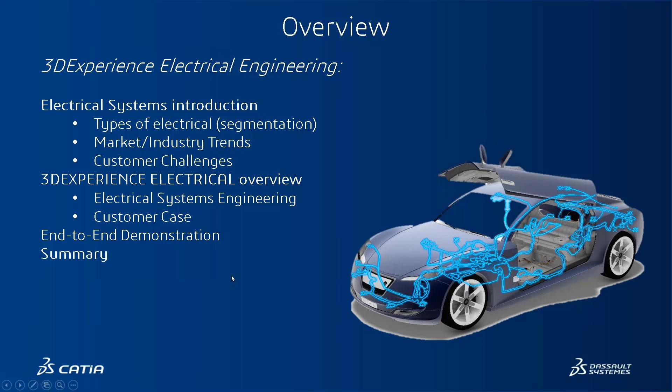Within Dassault Systemes and the industry, we see mainly three types of electrical systems: first, wire harness; second, cabling; and then electrotechnical. The wire harness is an assembly of connectors, wires, and cables, as well as additional components that bundle them together, such as coverings, fixtures, etc.

And the last segment is the electrotechnical. It deals with machines, cabinets, panels, and things like that, and this can be found in almost any industry where cabinets and panels are used. This is typically a use case of combination of wire harness and cabling within a very structured space.

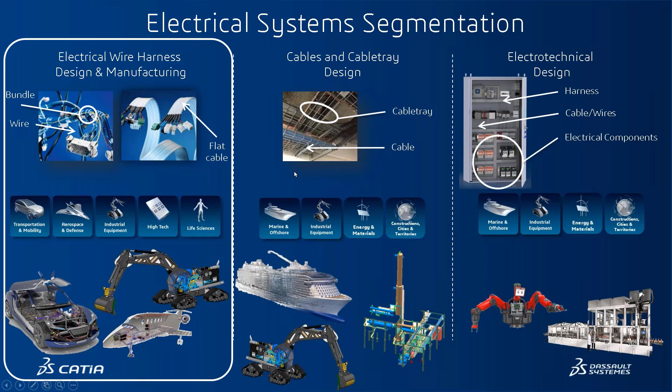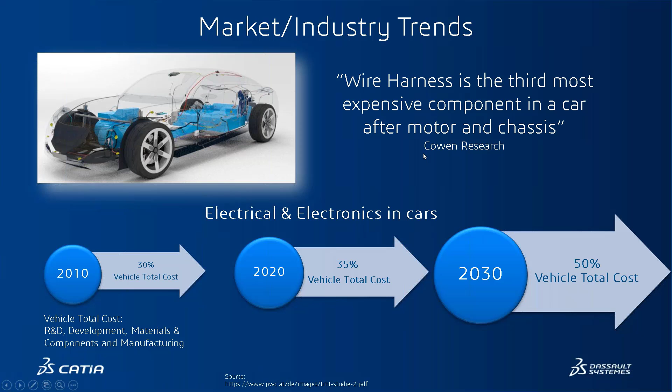If we look more specifically at the challenges this brings to our customers, we can see the challenges from the market, like cost, quality, and shortened time to market in a very competitive world. We see product challenges to have an accurate description and up-to-date information along with the process, and to avoid expensive physical mockups. Process challenges to reduce the number of applications and platforms, and avoid changes late in the process that would be very expensive.

Traceability or digital continuity is becoming a more and more critical subject with the complexity of the system. There are always simulation challenges in wire harness, both on the mechanical side and the electromagnetic side. And finally, there are manufacturing challenges such as supplier collaboration, digital continuity from engineering to shop floor operation, process planning, and work instructions.

If we look at a currently very simplified implementation that we see at many of our customers today, the harness process is covered by many applications, each with their own database or simply file-based. The communication and collaboration between the applications are very poorly defined and, in most cases, manual. This means there will never be up-to-date information available, as indicated by one of our customers, who said that as soon as we are working on a manufacturing drawing, the design is already six months old. These kinds of implementations can never address the challenges that our customers are having, as explained here.

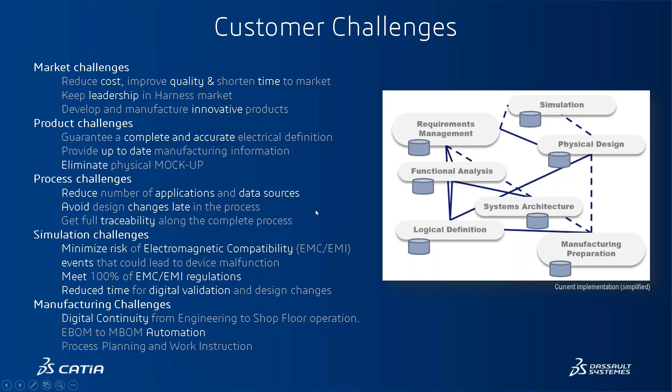So our vision is to provide an end-to-end integrated electrical system engineering collaborative development platform, to make sure that our customers can develop the most complex wire harness with the right quality, within the shortest time and at the lowest cost. The process has to be end-to-end because it is essential to cover the full process, from requirements up to the wire harness in the vehicle as installed.

The process has to be fully integrated because any data migration or duplication will prevent us from achieving full traceability and will cause additional data loss. The process has to support systems engineering because this is core for many customers, to have this very well-defined approach to solve the complex system problems that we have today.

The system must be collaborative because an electrical system like wire harness touches almost every part of the design, and it has to be worked on throughout the development process with collaboration between the different disciplines. We also need to collaborate with requirements, manufacturers, and other stakeholders to ensure the success of the harness assembly. And last but not least, it has to be a single platform, because only a platform can help integrate all the processes with consistent data and full traceability.

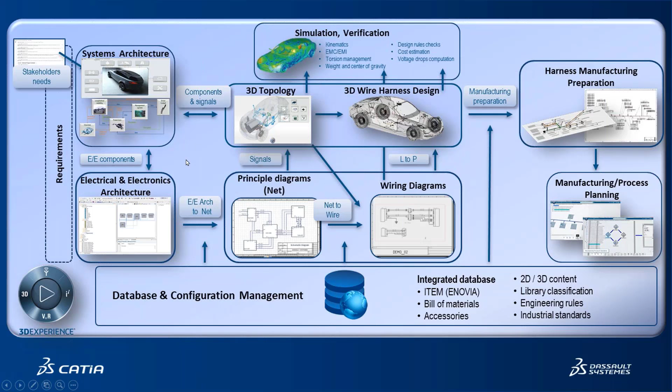This is where the system architects, for example, define the LRUs for each system and subsystem, and where they are located in the aircraft are also defined. In NoMagic, the net level information is also provided for analysis.

In the 3D, we collaborate with the system architects through aircraft zoning and equipment space allocation, which allows the system 3D architect to place the preliminary equipment inside the 3D space and perform space analysis.

With the space allocation applications, you can perform things like zone study, not just the geometrical but also functional zones.

The pathway is defined in the 3D space to estimate the volume required for each system. In this case, we are only looking at the electrical system, but it's also possible to perform the same for the fluid system as well.

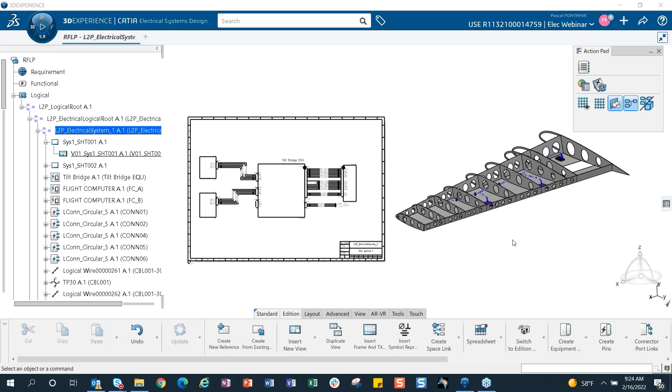I will do a live demonstration of the end-to-end electrical process with core CATIA capabilities, from the schematic to the 3D model, and then I will finish with a flattening process, mostly the documentation one. I'm not starting from scratch due to time limitation, but I will enrich this diagram, and then use the logical to physical assistant to position parts directly from the diagram to the 3D model.

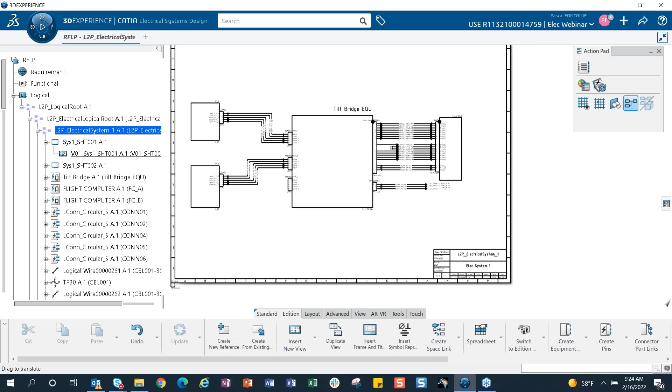Now I'm going to switch. I'm going to hide the 3D geometry, and add the grid and the snapping grid that will help me position equipment, connectors, and cables in the diagram.

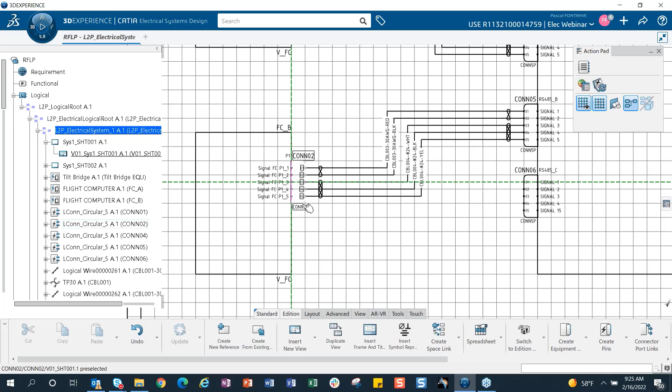As you can see, I already have some equipment positioned, what we call the LRU, defined as equipment. We have some connectors, and on the harness side, we have cables, twisted pairs, things like that.

In this process, I will use two different techniques to place parts in a diagram: the catalog function, and then placement of existing parts already placed in a schematic, using the creating from existing function.

Now in the first step, I'm going to place another equipment using a catalog browser. You could access the catalog browser from all these apps or functions at the bottom of the screen, but there's something called action pad where you can add all the functions you use very often.

Like that, you don't have to switch between different tabs. So I'm going to place an equipment from my catalog.

Usually this catalog is managed by a standard parts organization in the companies. So I'm going to place it. You double click or you can do right click, insert.

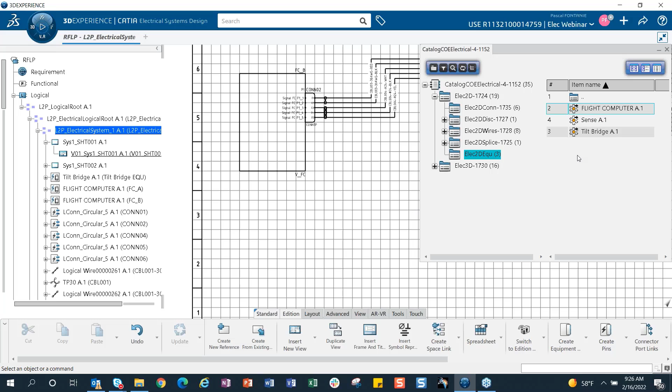The first time you instantiate one, it takes a few seconds, because the first time you are accessing the database.

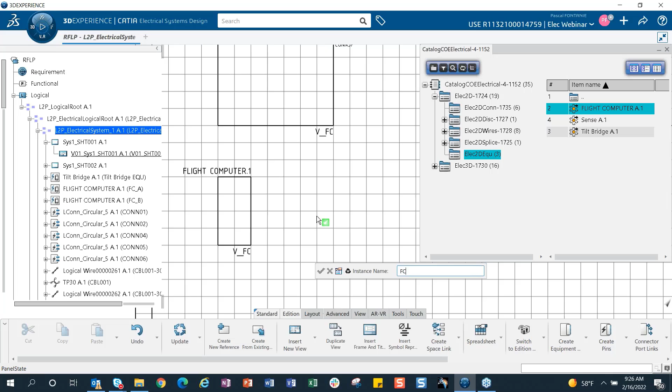Here we go. So you can zoom in, place it in space, and at the same time type the instance name, also known as instance title. You validate, and then you will see that name.

If you scroll down in the tree, you will see that your equipment is already placed here. You can resize your equipment. This equipment is coming from this catalog.

It's the out of the box representation of the equipment, but if you want your own representation, that's something you can do. We have a 2D representation for each part, but I'm using the out of the box function here.

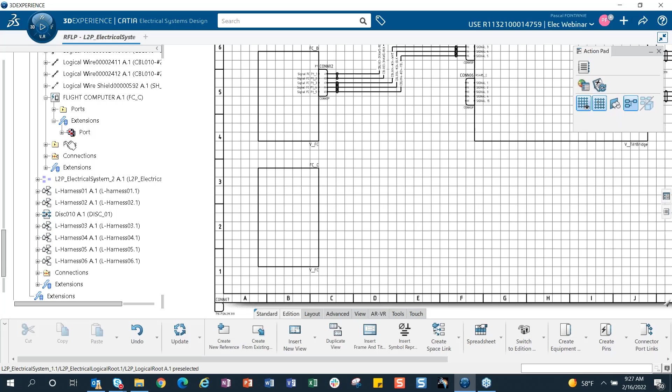So I'm going to minimize the catalog. And now, on the extension node, you will see this port that represents the connectors on the equipment side.

For this demo, I'm going to place one. I'm selecting P1 in this case. I do place in view, selecting the location on the equipment.

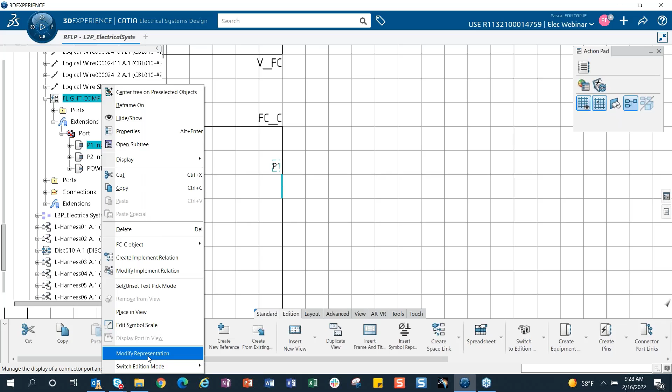And then I can modify representation, and say I want to display the pin. You can select all the pins or just a few of them. I click OK.

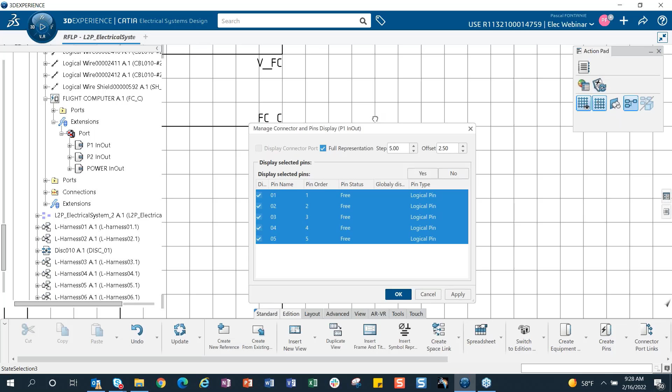And now you will see all the pins. I decided to show all the pins for this connector on the equipment side.

Now for the second step, I'm going to place the connector from the harness side. Same thing, I go back to the catalog.

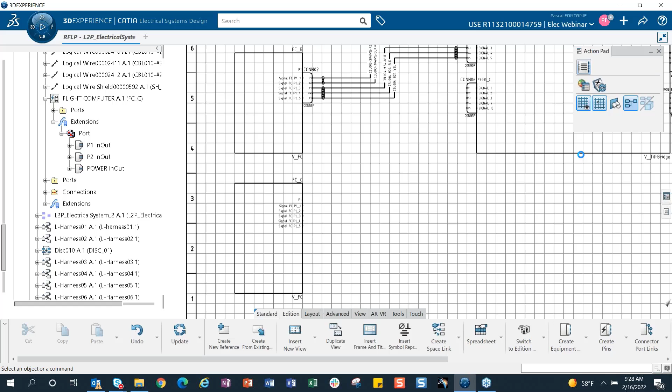I'm going to use a different chapter because to be well organized, it's recommended to use different chapters. I have one for equipment, one for wires and splices, and one for 2D representation for connectors. So I'm going to use this connector here.

So you just place it in space anywhere on your diagram. And then you have different options if you need to rotate the symbol. Now this time I want to display the pin.

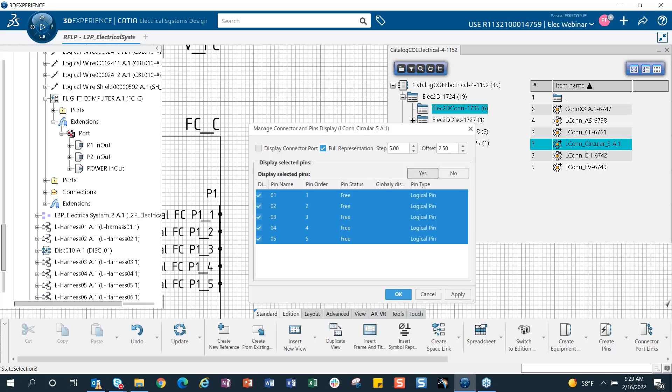So I want to display all of them. You select the first one, Shift key. Yes, you click OK. And then you want to link it to the connector on the equipment side.

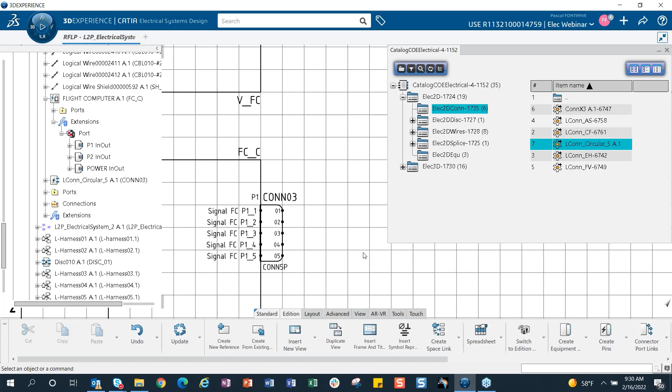So you click on it. And then you can enter the instance title or instance name of the connector. You validate, and then you will see the connector.

And now this connector is linked. The connector from the harness side is linked to the connector on the equipment side. And so all the text you can see here, they could be managed. So in this demonstration, what we are showing is the instance name of the connector.

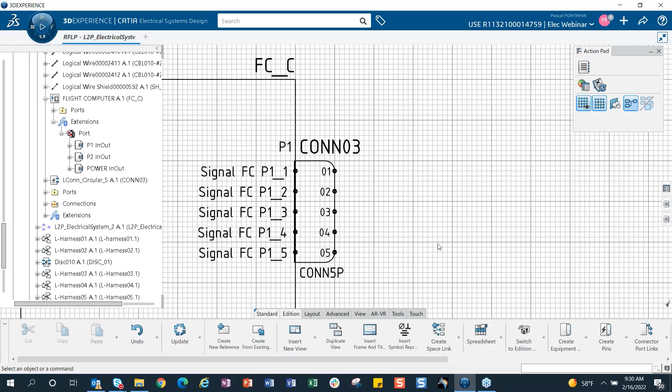And here we decided to show the part number or the reference or the corresponding part in a physical model. You will see later on in a demo what I'm talking about. And now for the next step, I'm going to...

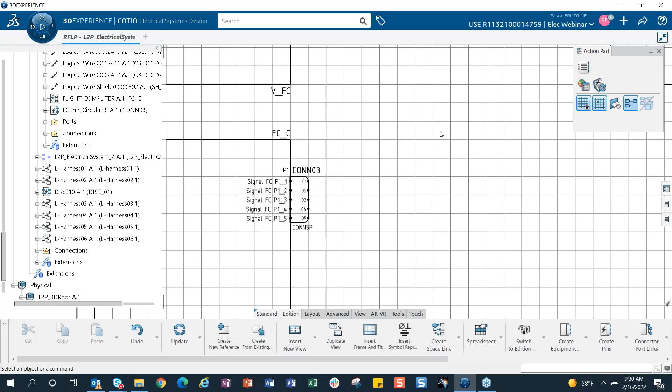place two cables. I could place it from the catalog because they're in a catalog, but in this case I'm going to show a different technique, where I'll be placing the cable directly from the diagram because I want to reuse the existing one.

So in this case, I could find the cable here. These cables are part of harness one. Let's say I want to place the first one, which is a twisted pair.

So there is a function named create from existing reference. And then instead of going from the catalog, I select it directly from the tree.

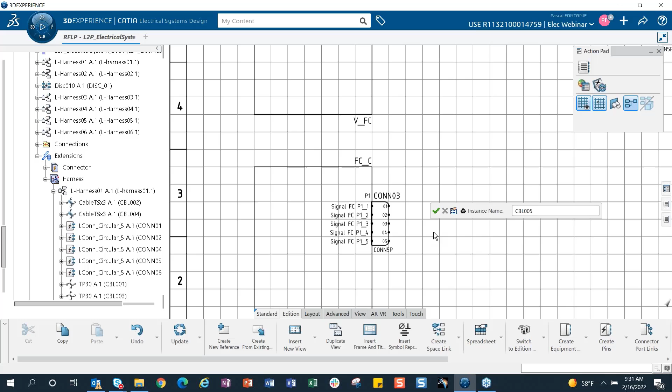Now I'm going to enter the new instance name. I validate. Now you will see that for this twisted pair, so it's a cable with two wires, a red one and a black one.

So the next step is to select the pin on the first connector and the end of the wire. So I'm selecting the second pin on this connector.

And as you can see now, you add these two wires. So now if you compare the existing one and the new one, the title of the wire or cable has not changed yet. It's coming later because we have some rules that allow you to rename the wire.

So I'm going to move it so you can drag it where you want, same thing. And if I'm correct, I think there is an enhancement coming that will allow you to move these two wires in the same operation. So now I'm going to place the second cable.

So same thing, I'm going to use the create from existing reference function, and I will use these 3 wires, twisted and shielded cables.

So same thing, I enter the new instance name. So you can see your white, black, and yellow wires part of this cable.

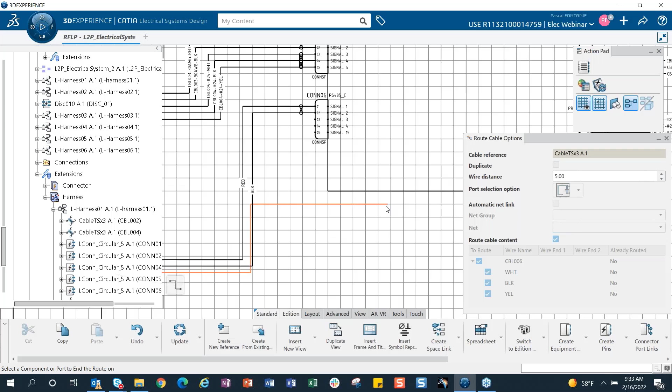So I'm going to select the pin on connector 3, and I'm going to select another pin on connector 6.

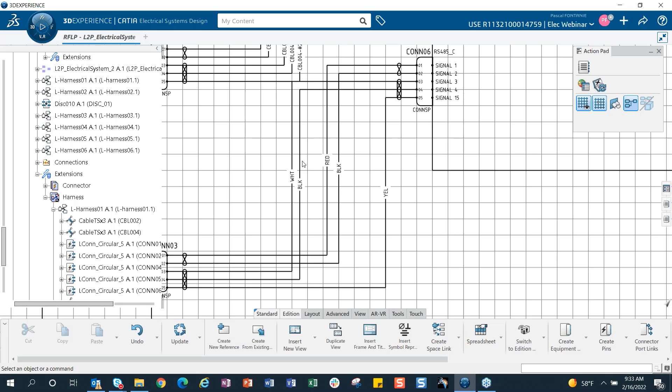So same operation. I'm going to modify the positioning of the wire. I will zoom in a little bit after I finish moving this one.

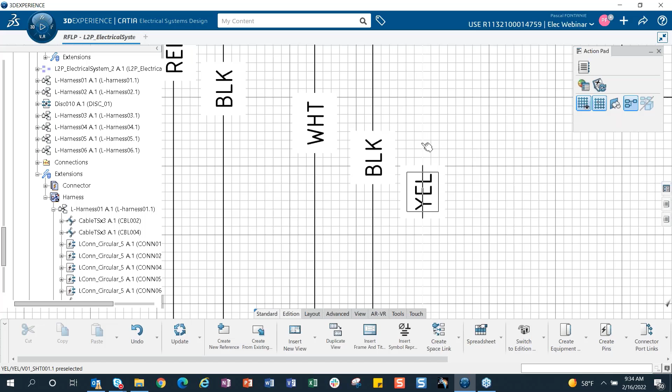So as you can see, you have 2 grids, the main grid and a smaller grid here. That will allow you to do the snapping, because I'm using this grid snapping function that will help you position anything, equipment, connector, wires, and cables on a diagram.

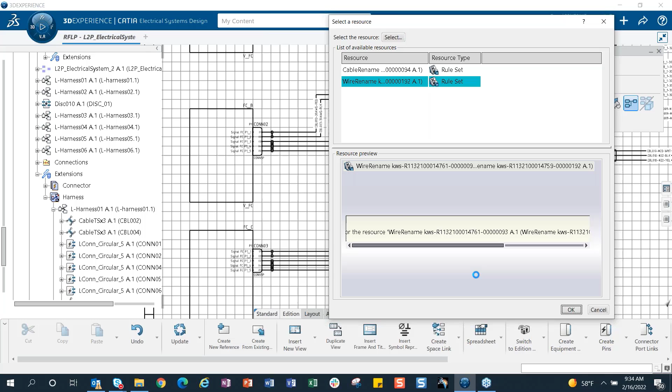So now I'm done creating this connection between these two connectors. There is one thing that I'm going to do now: rename these 5 wires based on existing rules. We created our own rules, but depending on your naming convention, the rules can be updated.

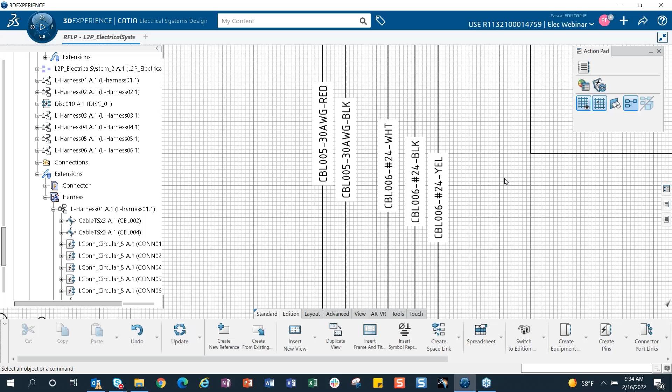So now, as you can see, if I zoom in, this is the rule. In this case, we decided to use the name of the cable, the gauge, and the color of the wire. But like I was saying, it all depends on your naming convention.

Now, the next step is to assign this connector and these 2 new cables to harness 1 here. There is something called BI Essentials that you can access from the toolbar, from the Tools tab. But since it's something you will use very often in your design, you can add it to your action pad so you don't have to switch between tabs all the time. In this case, I'm going to use the function called Electrical Harness Link Review.

So there is this color coding explanation telling you if your wires, equipment, or connectors are linked. As you can see, as I place this connector and these 2 cables, they are not assigned to any harness yet, so that's why you have this color: not linked.

So what I'm going to do now is leave this function, and under edition, still part of electrical system design, I'm going to go to the function called harness content links.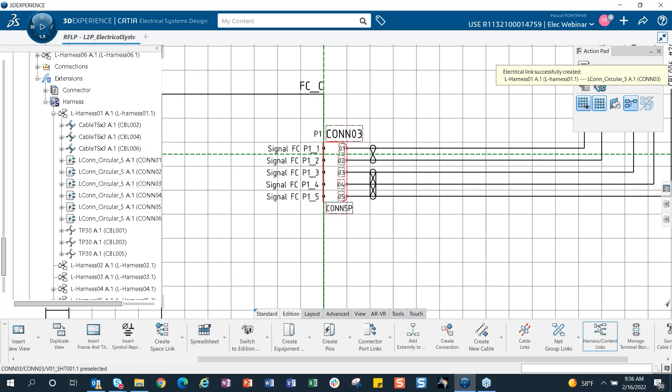So I'm going to select harness 1. The connector will be highlighted so you can see it in the tree, on the diagram. You have 5 connectors, and now you are not selecting the cables. I'm just going to select connector 3. As you can see, by selecting connector 3, the connector has been added under harness 1, so it belongs to harness 1.

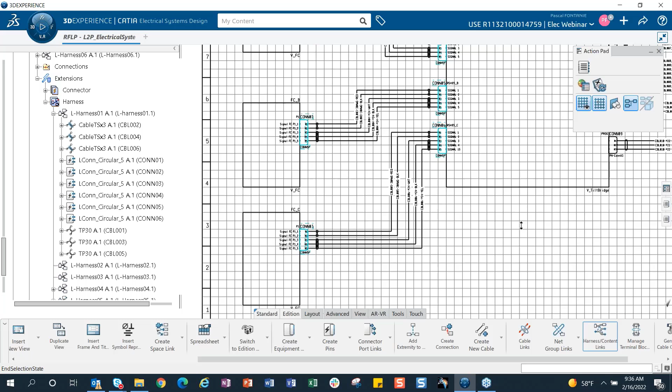And these 2 cables, cable 6 and cable 5, now they are reporting to harness 1 because they belong to harness 1. Just to make sure the function works, I'm going to run the harness link review command one more time, and you can see the color change because now the 2 cables are linked to the harness. If you click on one wire or cable, it will tell you that this wire belongs to harness 01.

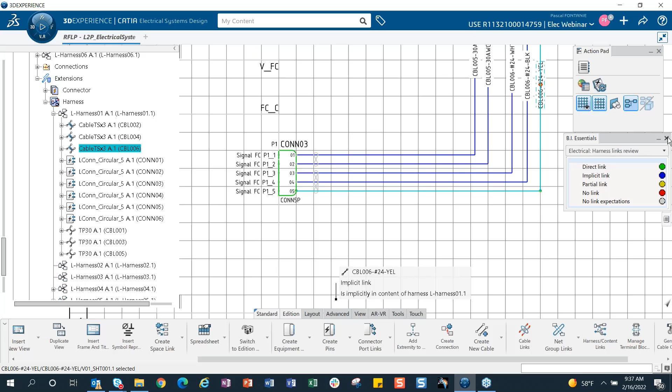So that's for the work done under electrical system design in the generation of the wiring diagram.

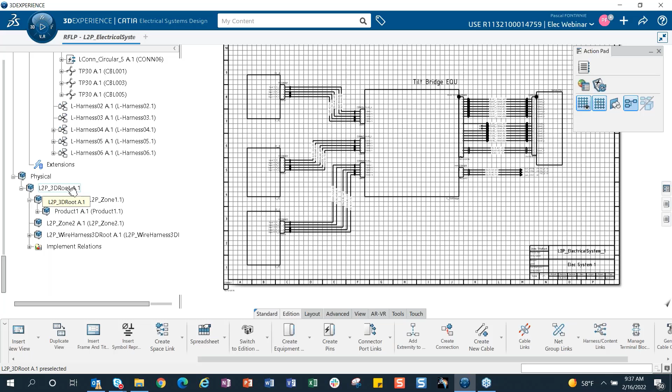So now the next step, I'm changing hats, and I'm going to switch to the 3D routing. As you can see, we have this wing, and as you could see in the diagram, we have these 3 equipments. 2 equipments have only 1 connector, and then you have this equipment with 3 connectors placed onto it.

So now in the next step, first I have to change applications, and I'm going to go to the electrical 3D design apps.

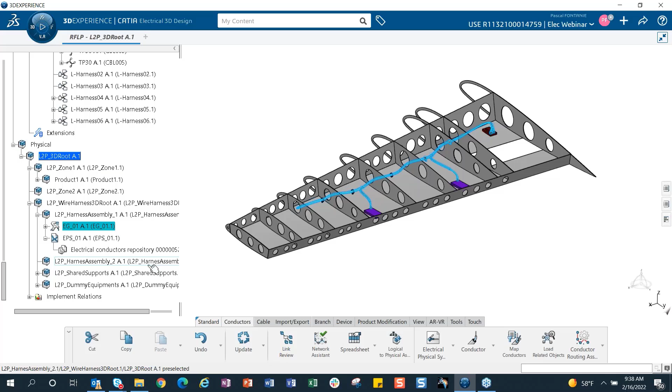So I don't need the action pad in this case. Now here, if I expand the tree a little bit, you have the wing here, and then you have another product, and in this product you will have the EG, which is called the electrical geometry, known in CATIA V5 as geometrical bundle. And then you have the EPS, which is where the conductors and wires will be routed. And then I have another product where I'm storing all my equipment.

And then you have support as well that can be placed inside the electrical geometry or outside the electrical geometry. So in this case, I want to place the equipment that I just placed in a schematic, into the physical model.

So there is this function called logical to physical assistant. I'm going to select it, and then I say I want to place the equipment.

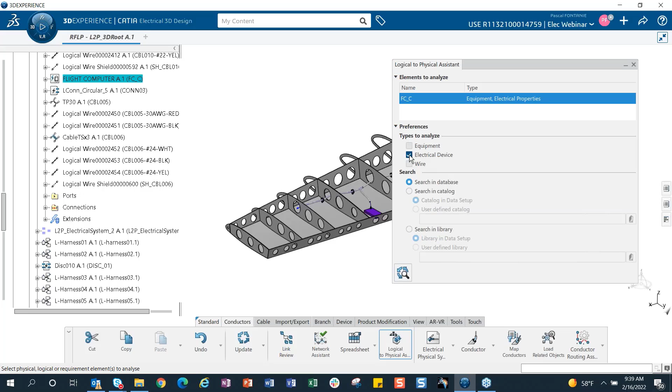So now if you select preferences, you have different things you can analyze, different types. In this case, I only want to work with equipment for now. You could do everything in one shot, but just to explain how the function works, I prefer to do it in several steps here.

So I'm going to select equipment, and then let me scroll down a little bit so you can see the screen. I'm going to select the analyze button here.

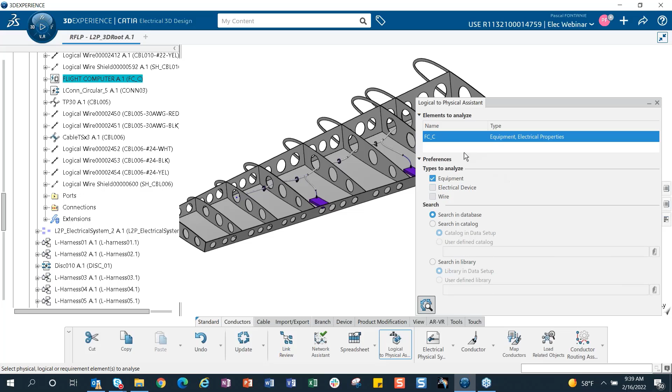And then the software is going to look at the diagram and find information regarding this equipment. So it finds it here, I select it, and now you can see it in the tree, and say yes, I want to place this equipment. So you have this function called set parents.

The set parents function is to specify where you want to instantiate the equipment in the physical model. So I do this, and then I'm going to select this product. I validate, and now you have different options to place the equipment.

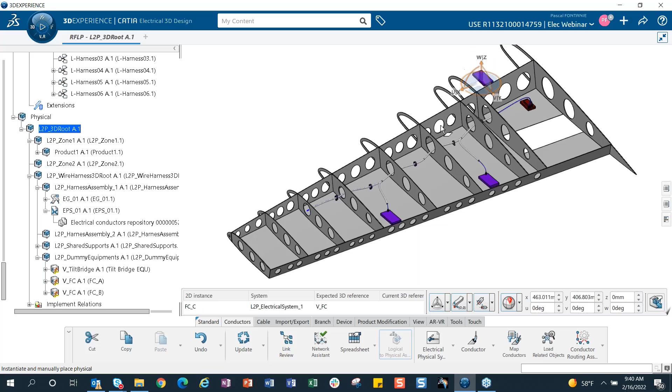So I'm going to select let you place manually. In this case, you see the equipment has been placed at the XYZ 0,0,0 of your installation, and then with the compass, you can move it to the approximate location.

So you can move it, and then if you leave the command, you can always use a snap function, but for the demo today, I think we are good like that.

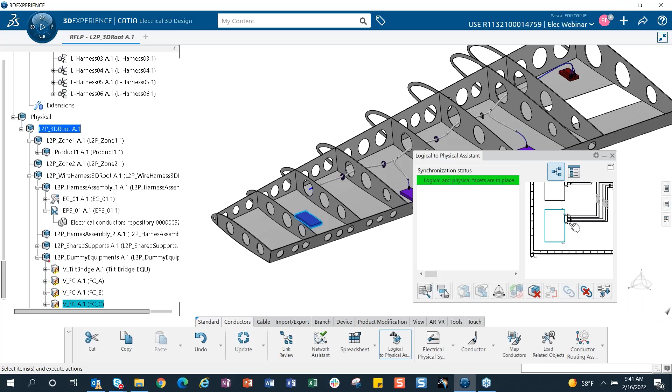So now it's placed. As you can see, you have the equipment now stored under the dummy equipment physical product, and the status changed to green. So I'm going to close the function.

You can do update. And as well, I need to specify that everything linked between a logical model and a physical model, an implement relation has been created. So if I click here, it will highlight the 3D model of the equipment, and as well up in the tree, the logical model. It's nothing you have to do, it's automatically generated, but it's needed for the L2P process.

So now the next step for me is to work on harness one. Same thing, I go back to the logical to physical assistant function, and this time I'm going to select harness one. I select preferences and uncheck equipment, but I want to work on electrical device. So same thing, you run the analyze function.

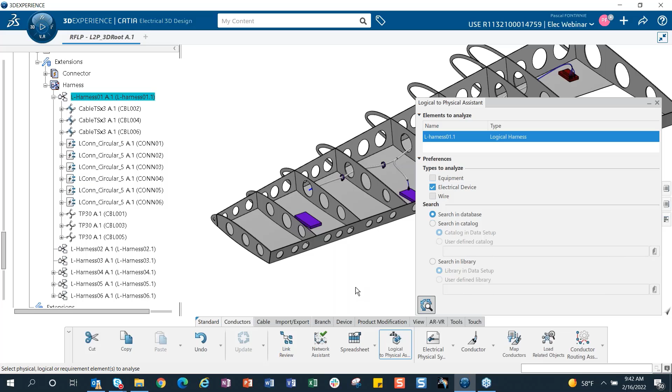And everything is live, it's not a video, so it's real time. In harness one, we have 6 connectors. 5 are already in place, as you can see. Now we need to place connector 3 that I just placed in a diagram.

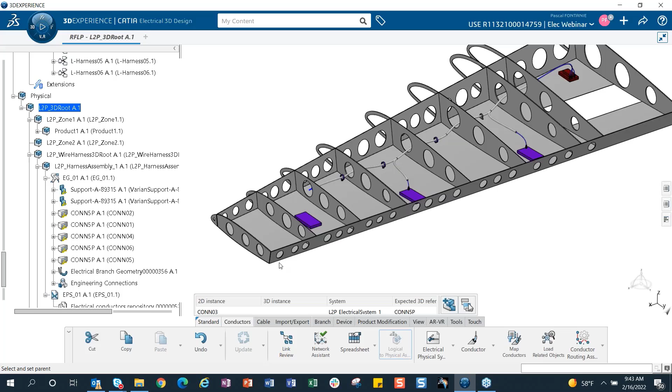So I'm going to select connector 3, which is highlighted here. And now I need to specify, same thing, where do I need to instantiate connector 3 in a physical model? So same function, you select parent. I say I want to place it under electrical geometry 01.

You see set parent. And now instead of using the let you place manually function, I'm going to use an auto place. So I'm going to slide the physical model a little bit and select place automatically. It's going to take a few seconds. And then you can see that the connector has been placed directly on the new equipment.

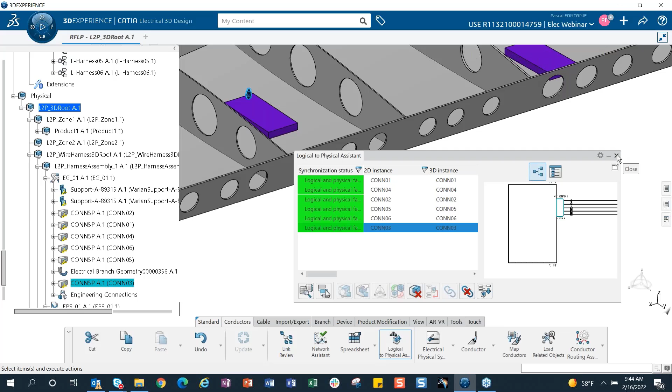So I'm going to close this function and explain why. In fact, what we have between the logical and physical model is a link based on these two parts. And on the physical model, there is what we call a cavity that has been defined on the equipment, and there is a cavity connection point on a connector.

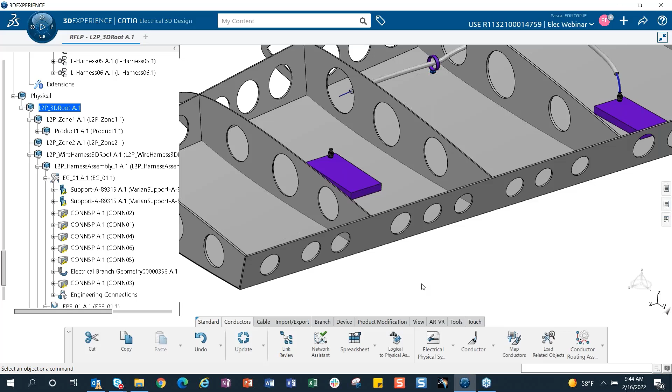And it's why they are connected together. There is another thing too, based on the symbol, the 2D symbol of the connector. In the 2D symbol of the connector, there's a function called a tab called predefined part number, and I enter the part number of the connector in the symbol. I'll show it at the end of the demo to explain a little bit more how it works, but it's very simple.

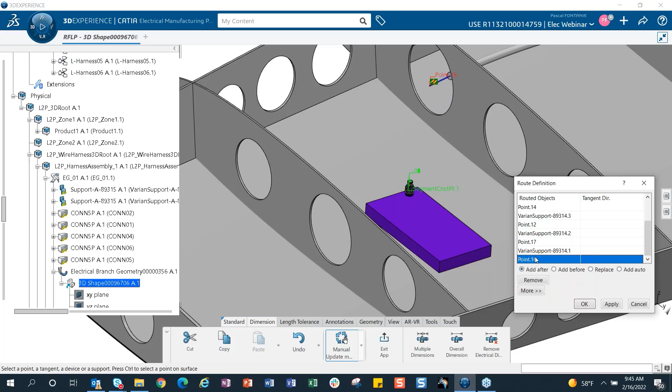So now, since I have the connector in session, I'm going to extend this segment here. This is like a regular routing method, like in CATIA V5, exactly the same thing. So I select route definition, and now this is point 16. I say I want to connect, to extend this segment to this connector. So I will select add after.

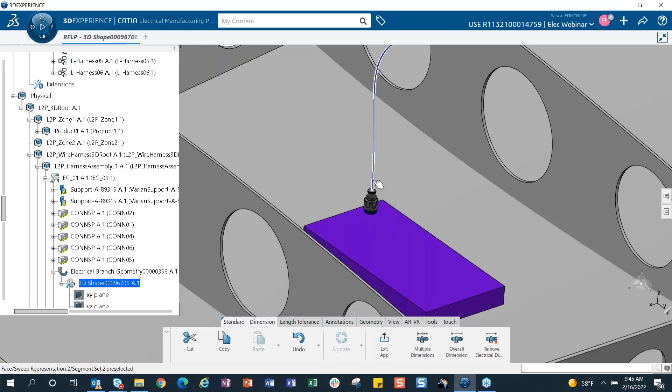So I'm going to zoom in, and once I see the segment connection point, I select it. I click OK, OK again, update. So now the connector is linked to the segment, and if I move the equipment, the connector will move, and therefore the segment will follow as well.

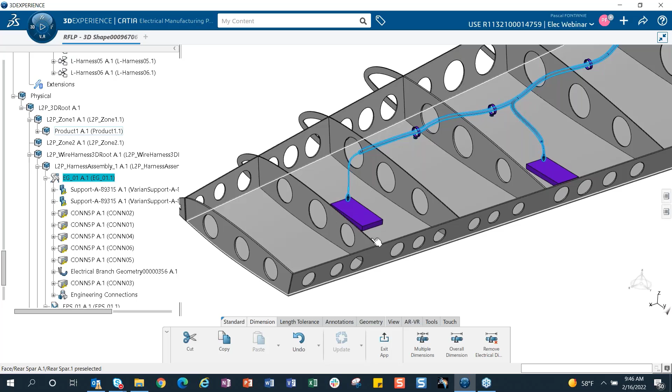So now that was for the placement of the connector. As you can see now, I have connector 3, that's the instance name, and you have connector 5P, which is a part number, the reference of the physical model. So now the next step is I want to route the wires.

Same thing, we are back with the logical to physical assistant here. So I'm going to select harness 1. And this time I uncheck equipment, but I keep electrical device, and now I'm selecting wires. So same thing, select the Analyze button.

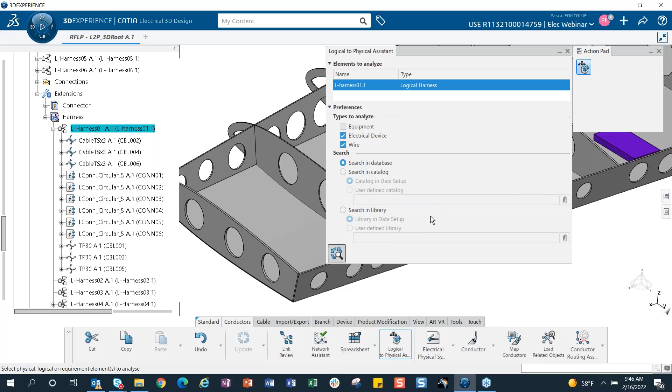So now, as soon as the Analyze function is done, you will have 2 tabs showing: electrical device 1 and wire 1. The electrical device 1 is all green because a few seconds ago I placed the connector in the physical model. So now we are going to work with the wire 1. Let me minimize the pad.

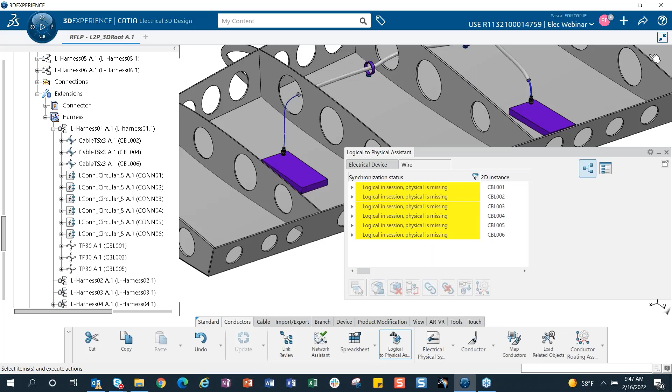So there is a little trick to be done with cables. In order to see all the cables, you need to do this little trick. So now the next step is I want to route these cables. So I do a multi-selection.

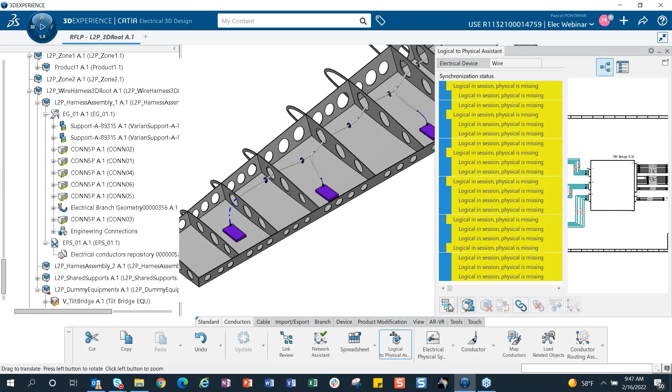Same thing, now, as before, you need to set the parent. So I'm going to the physical model and I say I want to place these cables in this physical system, the EPS. So I click OK. And now I'm going to resize a little bit, sorry about that, and I'm going to select the place automatically.

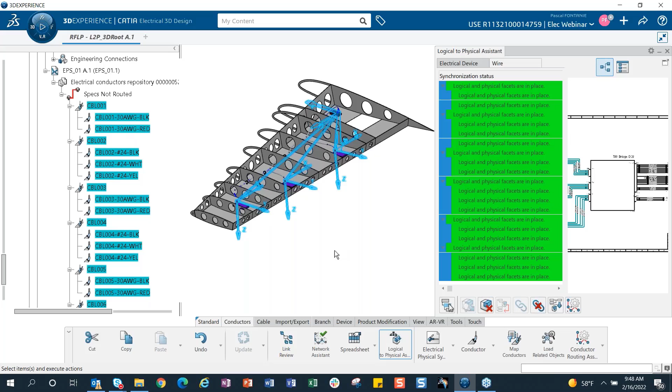So as you can see now, all the cables have been added to the physical model, and in a physical system, EPS, electrical physical system, they are not being routed here. As you can see the message, it says specs not routed, but you can see the connectivity for every cable from connector to connector.

Now the next step is to go to the conductor routing assistant. I could close this window and access it directly from the conductor tabs. But in this case, since it's available now under the logical to physical assistant, I'm going to run it from here.

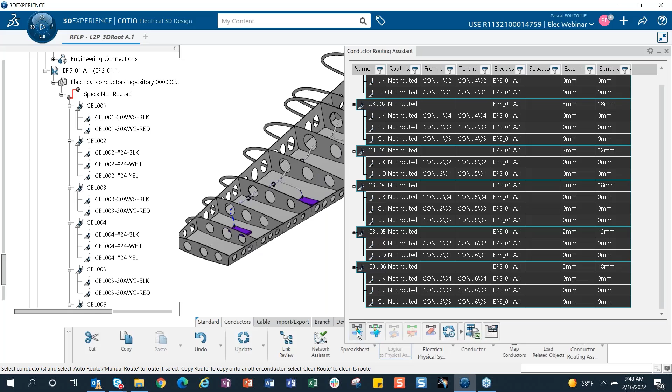So now you have all the cables here. I'm going to do a multi-selection. I'm going to route them. And you can see all successfully routed.

So I'm going to close this. I'm going to close this one too. And as you can see here, the message changed to spec fully routed. But I'm going to do update.

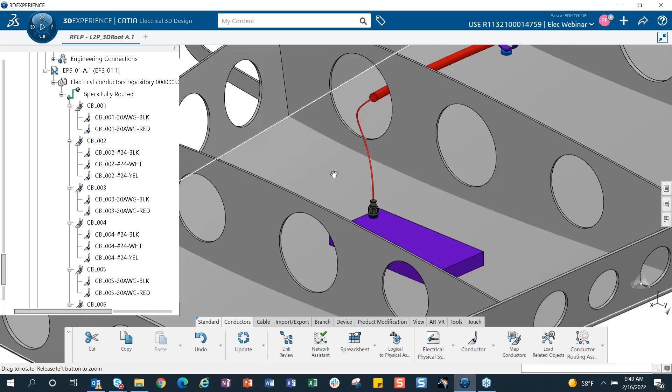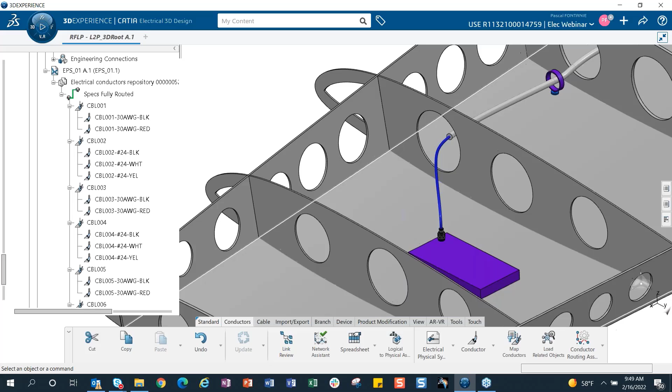And I want you to pay attention to this segment. So I'm going to do update. And now the diameter of the segment changes because we have a diameter assigned to every cable and every wire. So by doing the update and routing the cables, it's going to resize the segment based on the diameter of the cable. And if you click on a cable, you can follow its path as well in the physical model.

So imagine if you have to repair or replace damaged cables, you can load your session, load the physical model and the 3D routing model, and see the in-space routing. It's very helpful when you have to replace damaged wires or add a wire to an existing routing.

So that was the L2P function. Now I'm going to touch on the 3D routing, the flattening piece of the process. So I'm going to hide this, because there is one more thing I wanted to show you since we are here.

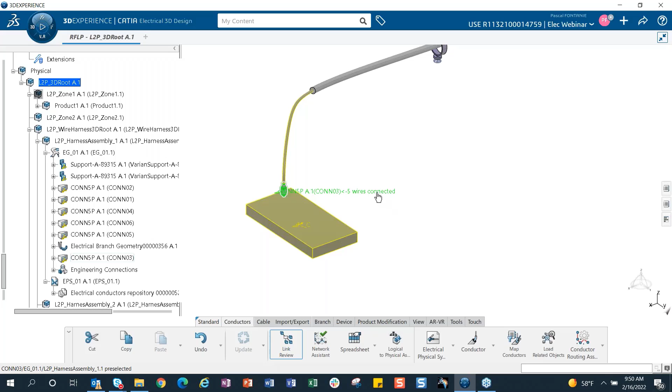If I use the link review function, if I select, let's say, the connector, it will tell me this connector has 5 wires connected to it, which is like 2 cables, 1 cable with 2 wires, and 1 cable with 3 wires. You have all this information right here. And if you select highlighted, it will help you highlight the connector in the physical model in 3D and in the tree as well. So it's called link review.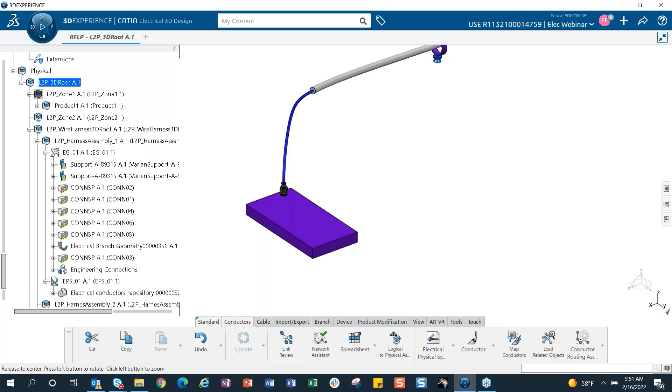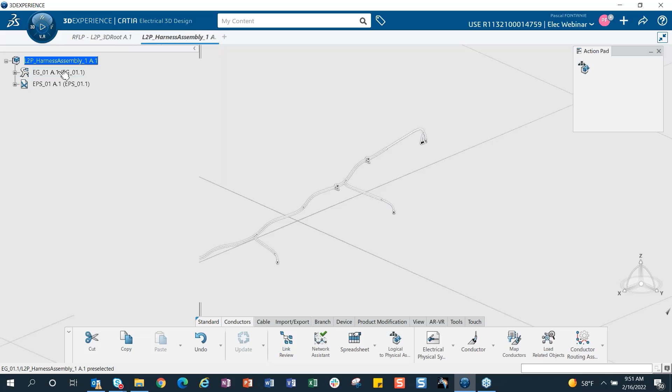So now we have a few minutes left, so I'm going to work on a flattened model. In the process, I don't need to have everything loaded here, so what I will do is load this product in a new app. It's a product with the 3D routing and the EPS with a cable.

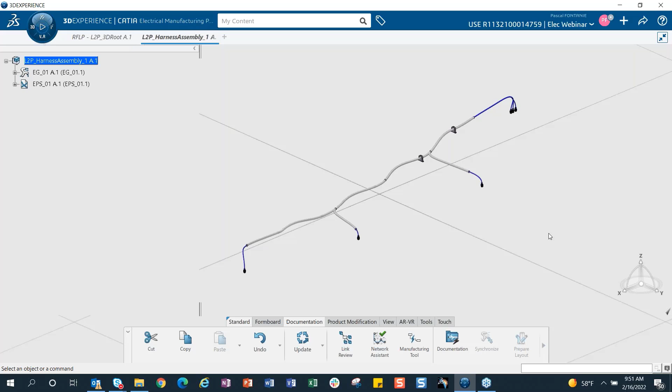So there are two different processes, maybe then I'll explain it, both manufacturing, but I will show one. Under electrical manufacturing preparation, we have two processes: one is full size formboard, and there's one called documentation process that I will be running now. Let me select the EPS while it's running.

So the documentation process, if you want to flatten it, it's not full size, but you could flatten it on, let's say, an A3 or 11 by 17 format. The dimensions will be automatically created. You'll see we'll be creating tables as well with a wire list that will be displayed. You can have a face view of the connector if you need to. I've seen some customers use it when they want to do inspection, let's say in a car or on an airplane—it's easy to carry because it's a smaller format, but you have all the information you need.

So I need to click on, sorry about this one. So in this process, the flattened model will be created, and a drawing will be created as well.

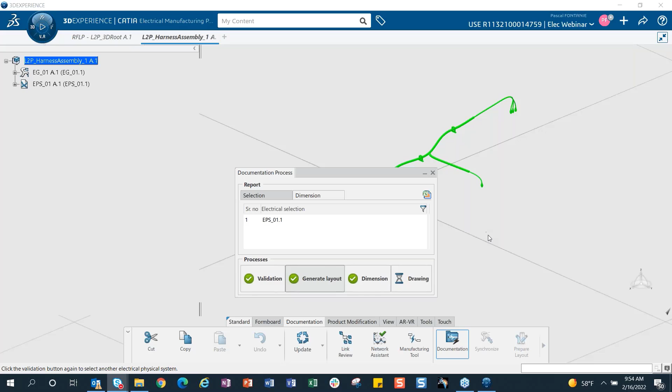Almost there. There you go.

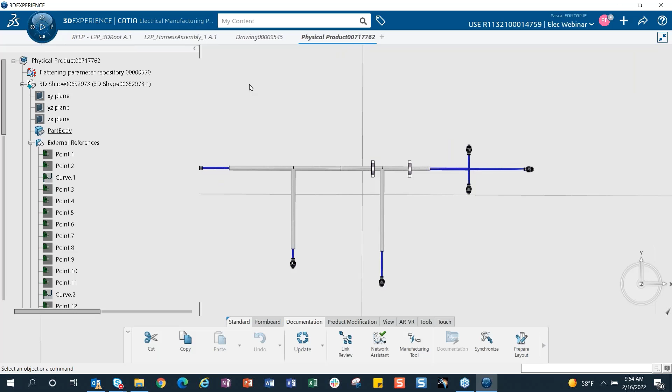So that's a flattened model. We came from this 3D routing, and then you have this flattened model automatically created, and now the drawing as well.

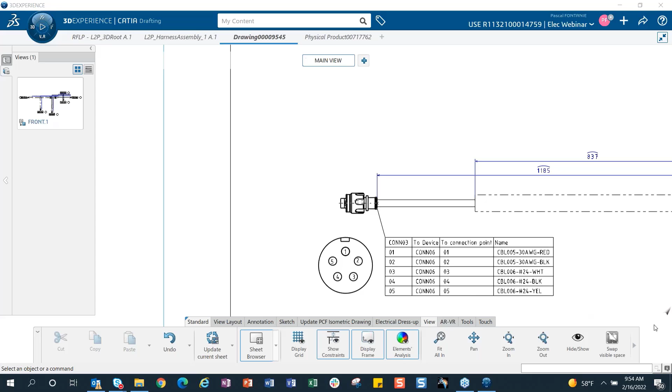As you can see, in this case we decided to show the 3D representation of the harness, the projection—I can move it. But if you don't want the 3D projection, you could have a symbol instead. In this case, we decided to have just a few columns, but in the first column, it's a connector instance name, the pins.

Second column, it's the two from the wire, the two connection points. So that means the cavity on connector 6 and the name of the wires going to that connector.

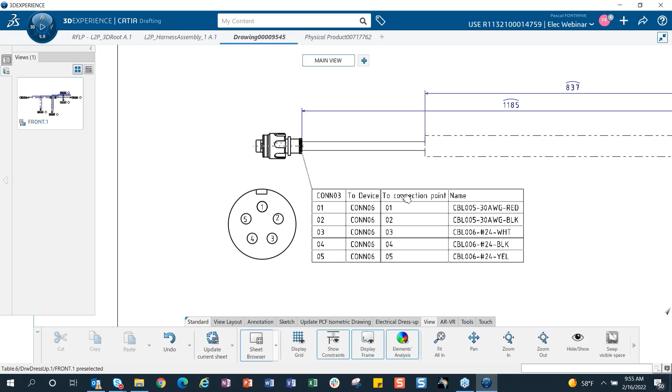So you have the face view. You can see you have all dimensions created. This special font here is because it's a covering, and depending on the type of covering, you could apply different fonts. As you can see, I have this dotted line here, and a regular line for this covering here, protective covering, so same thing.

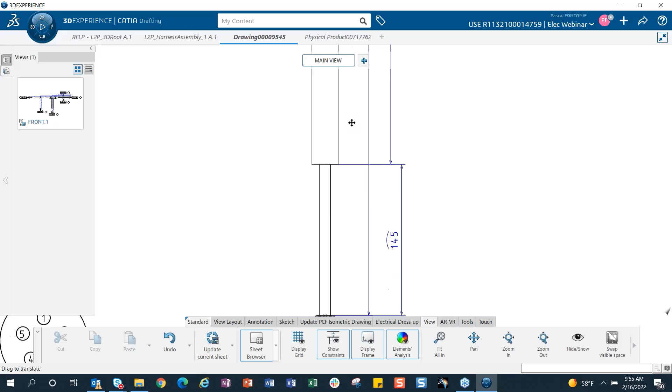So you can move these things around. It's a very simple harness for this live demo, but we can add way more information. We can even print like a BOM, E-BOM, and place it on the face of the drawings if needed. In that case, we have two supports that were part of the harness, so they are displayed here. If you don't want to display the support but show a symbol, you can replace it by a symbol.

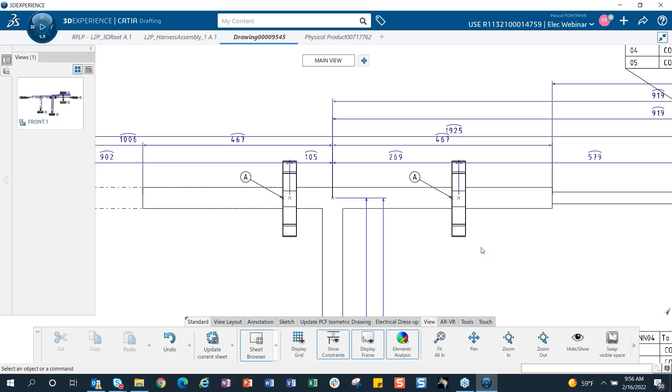And everything is managed by what we call a GVS, Generative View Style, something that was already available in CATIA V5. So that's it for my

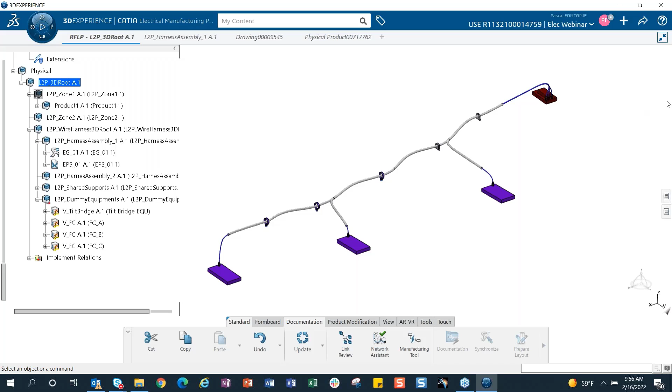Live demo. I think I need to give the floor back to Zen. That's correct? Yes, thank you, Pascal. Here we go, Zen. You have the floor. All right.

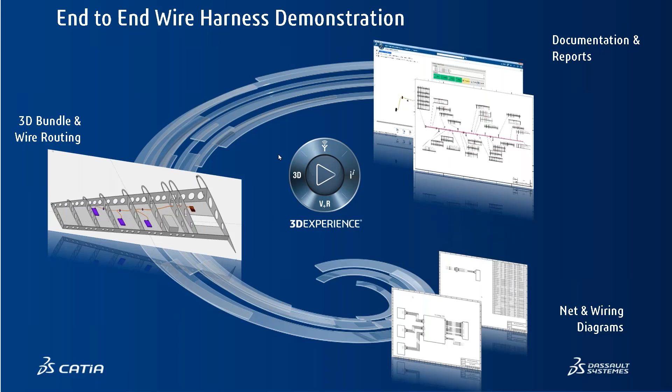Thank you, Pascal, and thank you for doing this live end-to-end demo. So in summary, with 3D Experience electrical engineering, we are able to deliver a complete wire harness lifecycle management system based on the 3D Experience collaborative platform. It provides an intelligent electrical system design environment and the integrated approach for 3D design and efficient manufacturing documentation solution.

And through acquisitions, multi-brand collaborations, and key customer engagements, we are expanding the scope to ensure full traceability from the MBSE system of systems all the way down to manufacturing operations, under the full configuration management engine offered by the platform.

We look forward to collaborating with our customers to validate and further improve our processes as always. And this concludes our presentation and demonstration today. Thank you so much.

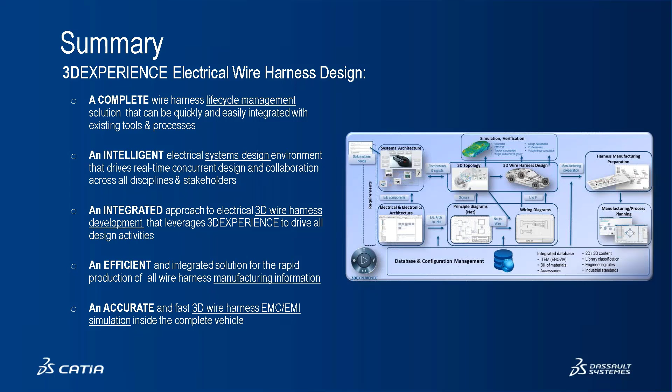So the first question I have for the two of you is, can CATIA Electrical provide point solution functionality for companies that do not want to adopt the 3D Experience platform?

As you can see today, we have an offering that is cloud, and this allows customers to quickly implement any solution, not just electrical, but any CATIA or any Dassault Systèmes solutions on the cloud without IT establishment on-premise. This cloud environment can be turned on within a few days, and gives you a full out-of-the-box environment to work on designs immediately.

So you don't have to adopt the 3D Experience platform, and you can use for example the schematic tool on the platform. With this tool, you are able to export the results into drawings or into different tables such as wire list and power list, to feed other applications as needed.